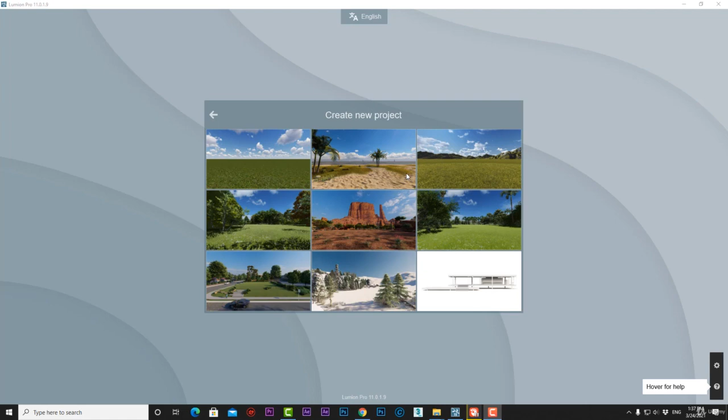The first button that we have is New. Inside here, we can start making a new project. We have 9 scenes that we can start with.

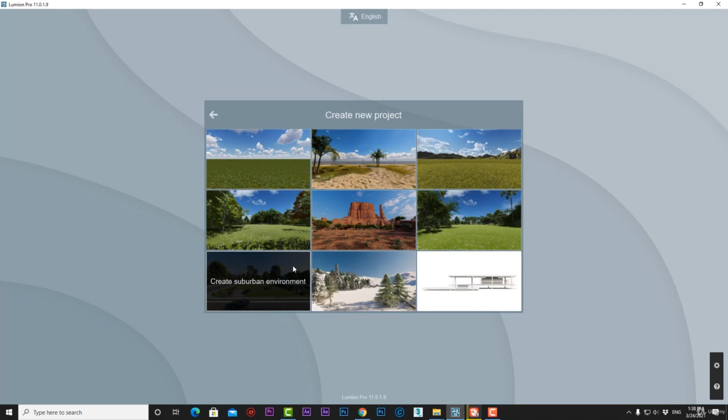Those 9 scenes are plain environment, beach environment, mountain range, forest environment, desert environment, tropical environment, suburban environment, winter environment, and design showcase. In plain, we have this open area of green land, grass, and blue sky.

Back to new by clicking Files and New. Next we have beach environment, and here we have a beautiful sandy beach with some plants and grass overlooking the sea with some boats scattered around - a perfect template scene for beach house projects.

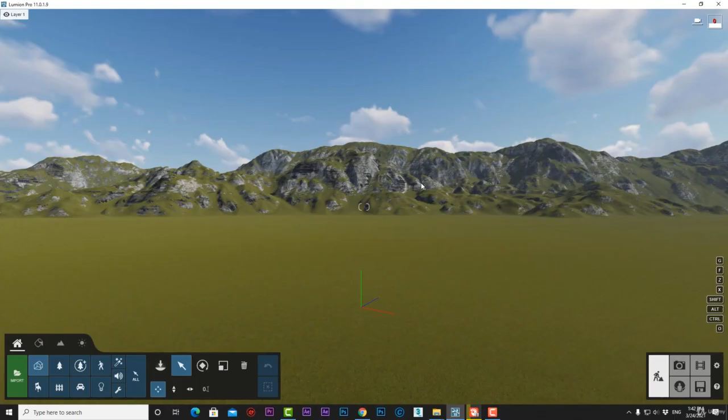Then we have mountain range, where we have mountains surrounding our scene. Next we have forest environment, where we have grasses and trees ready for our project to be placed among them. Then we have desert environment, an American red desert environment of the wild, wild west.

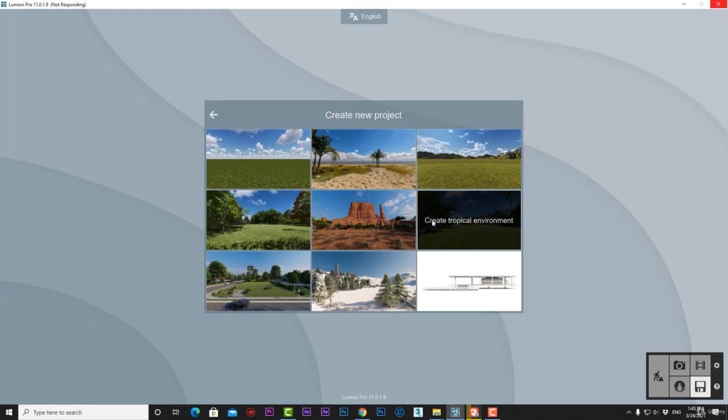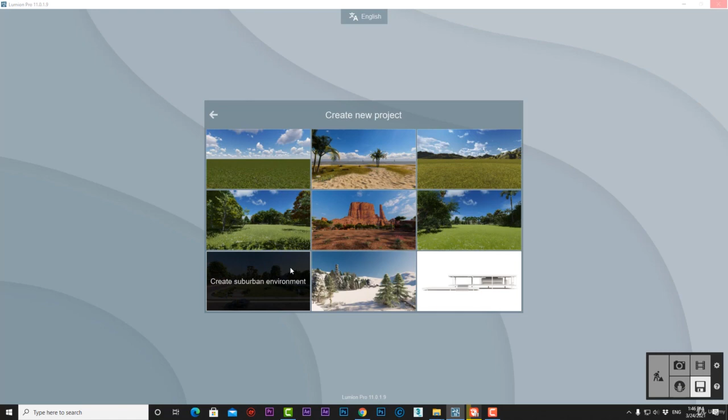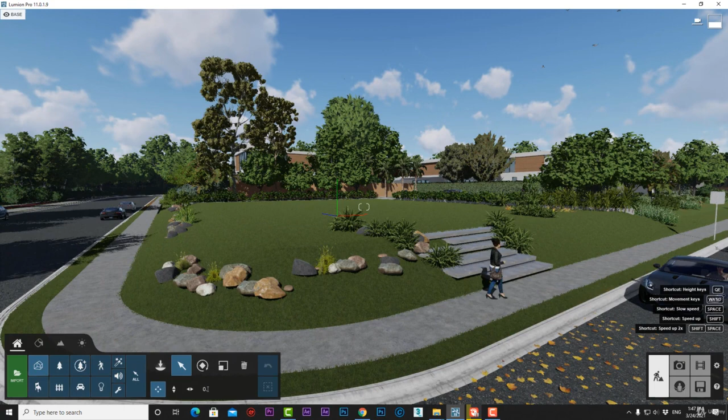Then we have tropical environment with tropical types of trees and palms, good for a tropical project. Then we have suburban environment, perfect for houses and buildings, with ready-made streets, curbs, people, cars, trees, and surrounding buildings. Then we have winter environment with snow all over the scene, with winter trees and snowy mountains.

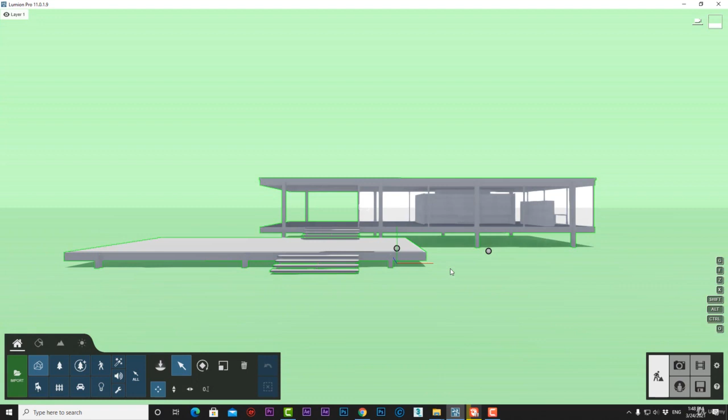And the last one is design showcase, a very simple white scene where we can showcase our design ideas without any distracting environment. And that's all in the New button.

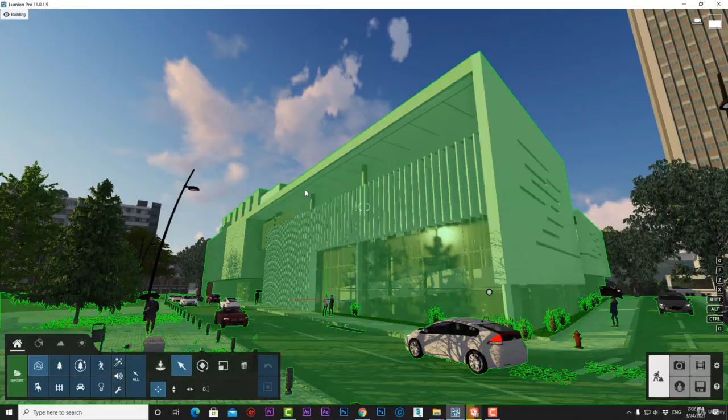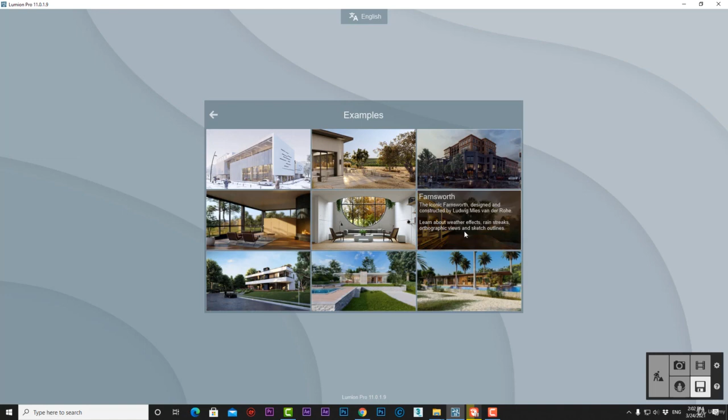Let's move to the Example button, and here we have 9 complete example projects that we can explore, use, or get inspired with, like that museum development project - a complete, beautiful Lumion project with all the details of streets, trees, people, cars, materials, and layers. We have 8 more examples that I encourage you to check out and get inspired by.

The other button, Create Diagnostic File - when you press it, it will collect all the hardware data about your computer and export it to a text file. That text file you can send to a computer professional who you can get advice from.